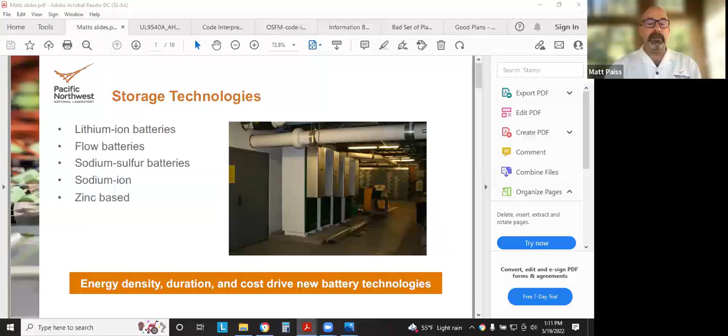They don't use cobalt, which has some human effects in how it's mined, and that's really critical. But from a hazard perspective, there are still some risks with any of the lithium ion chemistries. So we really want to encourage safety at a system level. That involves the quality control, the cell manufacturing. You can have a top tier cell that has a manufacturing defect that could result in a thermal runaway event. How the battery system is put together, the battery management system, and that is really the key device that manages the charging and discharging of the batteries.

And if there's any overcharging or undercharging, it's the BMS that will turn it off. The communications among all these subsystems, the environmental controls where required. Any fire protection system really needs to be tailored and designed for that hazard. And then the last item really is one of the key ones. It's workmanship. You can have quality components, but an error in the workmanship could lead to a fire. So it really truly is a systems approach.

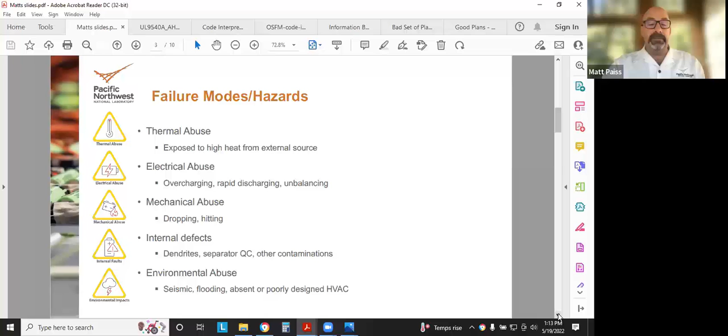primarily micromobility devices. So one of the questions is, are these devices meeting the requirements of the UL listing for micromobility devices? If they are, then we need to look at where there's a gap in those standards and try and address it. But internationally, that standard, and I know Megan, you're on the call, you'll correct me, drop in the chat the actual UL number, 2272, is really an important standard, but it's not necessarily adopted internationally. And so we would like to see that.

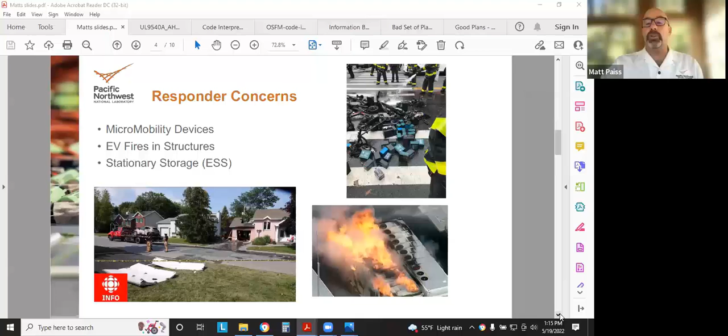And then lastly is the stationary storage. Thankfully, there are not a lot of responses that responders are having to go to. However, we're still fairly early. And so we do want to get ahead of the curve in terms of training and recommended best practices. Okay, so I just want to put that out, that the reality is this is where the fires are occurring. It's primarily in the smaller devices first.

Okay, next slide, please.

Now, in the residential space, which is the majority of the people on this call, there have been a couple of incidents and some recalls. Luckily, the manufacturers are trying to respond to these very quickly to identify gaps in either the design or in the codes and standards. So some of the earlier installations were not required to have gone through large-scale fire testing. And now that is a requirement based on the second edition of 9540. It does require the fire testing to 9540A for residential batteries that are installed indoors or on walls.

The bottom picture is actually from Germany. And since that incident, there's actually been several more in Europe, and even an explosion in a residential battery. So that is a great concern. The explosion risk is probably the greatest concern. Fires, while they can cause a lot of damage to the building, the explosions actually can be significantly damaging. And to date, the only fatalities that have occurred were due to an explosion in a utility scale system in China, to some firefighters. Okay, next slide.

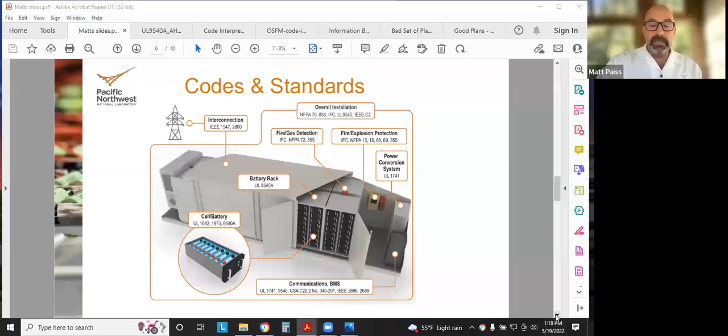On the residential side, we have 1973, 9540, and the 9540A standard. I think I have a slide. I'll get into that in a minute. So, okay, let's go on to the next one here. Okay, so let's dive real quickly into 855 and the International Fire Code. These are the key installation documents or codes that reference the installation of energy storage systems.

855 is really only enforced in about 5 states, but if you're in one of those states that adopt the international or the NFPA 1 fire code, the section on energy storage, I believe it's chapter 52 in the 2021 edition, just points directly to, it's a redaction from 855.

The 2021 IFC, which is the most current published one, but not widely adopted yet in the US, very closely harmonizes with 855. And the 2024 edition, which will be released later this year, will have further improvements. NFPA 855 is getting ready to release its next edition, the 2023 edition, after the technical meeting in a couple of weeks, barring last minute floor votes.

You could actually go online and see what the second revision looks like. It experienced a lot of reorganization and some refinements in some sections. Okay, so I bullet the key areas that it references. Okay, let's go ahead to the next section.

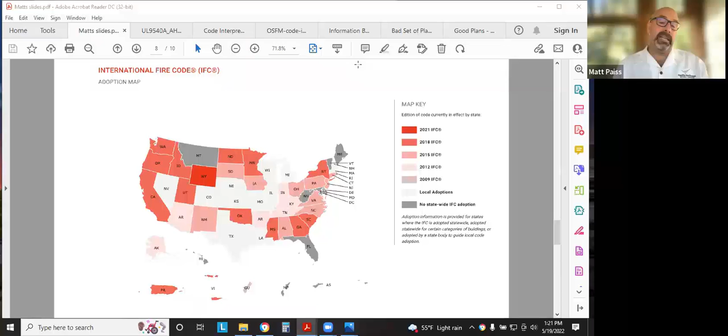But not all states adopt even statewide. You can see that the white states don't adopt statewide, they adopt locally. So you could really have even more of a checkered quilt effect. And so for those of you that are national installers, you understand that pain. So that is one of the challenges out there. Okay, next slide.

Okay, so 9540, and let me just see real quick here. You know what, I think what I would like to do, Brad, I want to hand this off to you now to have you talk a little bit about your experience in the process of approving systems with listing. And we can go back to the 9540 slide or use that one here, but I wanted to hand off to you. Actually, yeah, just before we get into that,

just on the last topic of which codes you're using, I just briefly want to touch on, because this is a very common question that comes up, is should I be using the residential code versus the fire code? The good news is, as we keep developing code cycles today, in the 2021 international code, they are very streamlined and there are very minimal differences between them.

So the goal of the international code committees is, and I'm speaking to the residential section, to get those residential sections aligned as much as possible between the fire code and the residential code. And there's still a few minor differences, but like I said, today, the good news is that they are very much in alignment with each other.

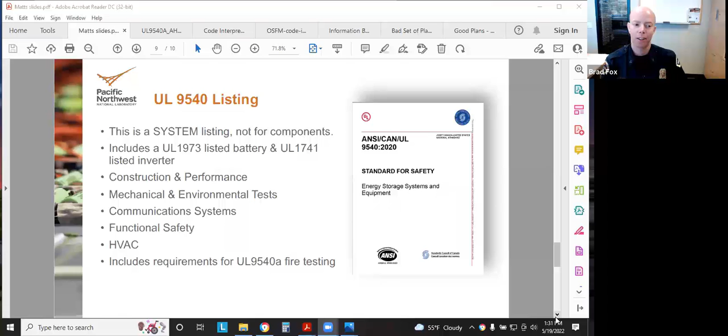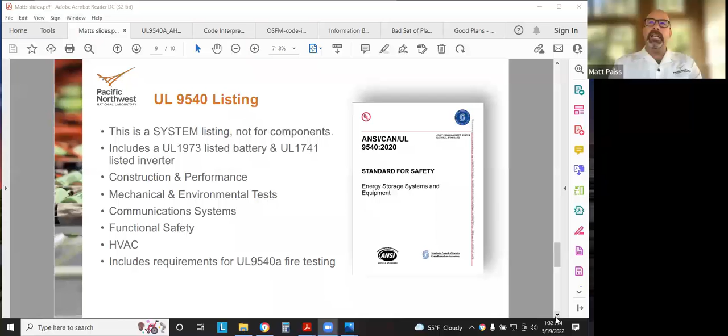So we still have questions out to UL and the manufacturer on how that affects their 9540 listing, but it's an interesting conundrum between the different editions. Brad, let me touch on that if I could. Yeah. The genesis of the 9540A test method was developed to help create data.

Lithium ion batteries installed in residential and commercial was in its infancy. There were some questions on safety. You really want to develop codes and standards based on data, not just a random 3-foot number, which truly is where that came from. So, okay, you create an initial number, you have a starting point, but you want to back it up with data so that modifications are based on data. So that's what 9540A was really intended for.

What we're seeing now is that 9540A is increasingly becoming a part of the product listing, depending on the locations of the batteries installed. So somebody could get their system listed to 9540 with the full knowledge that this system will be designed to be installed in remote locations where, per the fire codes, there is an allowance for not having any fire protection. However, many systems are being designed to be installed in multiple locations. And so that manufacturer is being guided to also do that fire test so that that data is available. And so that's a little bit of the evolution.

In the second edition of 9540, the 2020 edition, it does require the fire testing for indoor installations, for residential installations. And so now where we're at is that there is a requirement in fire codes that the fire test report be made available to the AHJs.

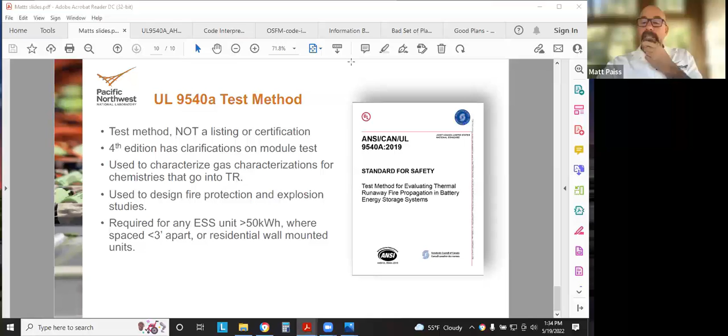Another key point that I want you to take away from this webinar is you need to review these reports. As Matt said, there's a lot of variation in the reports. It's not a listing, so it's not something that you can just take and say, well, someone's submitting this 9540A report to us, so it must be okay. In my jurisdiction, we have yet to review a 9540A report that we didn't have comments for. We have yet to approve one on the first go around. Even reports from UL, who's writing the standard, we always have comments because the reports differ so much.

In this webinar, we're not going to teach you how to review these reports. That is an entire class of itself. But I just want to touch on some highlights and again, please be aware that you have to review the reports. And if you don't want to learn how to do that or don't have the expertise, talk to some of your fellow jurisdictions, neighboring jurisdictions who have reviewed them. Use the networking that you have available to talk to others. Or, I hate to say it, but if you're not going to review the report, I would err on the side of safety for the residential systems and say you cannot approve them.

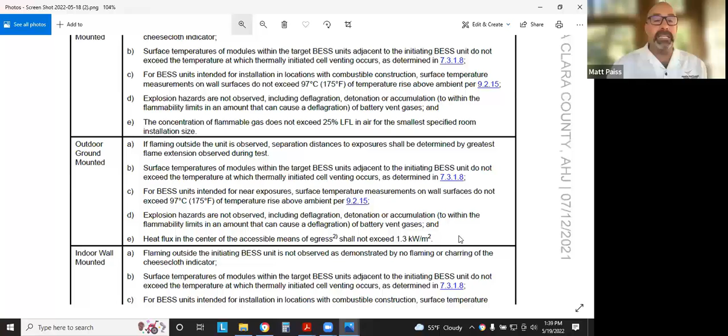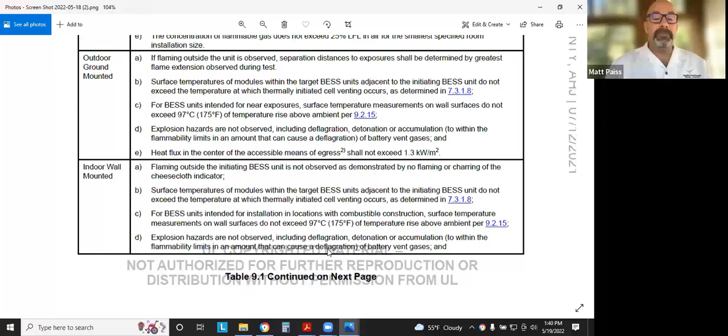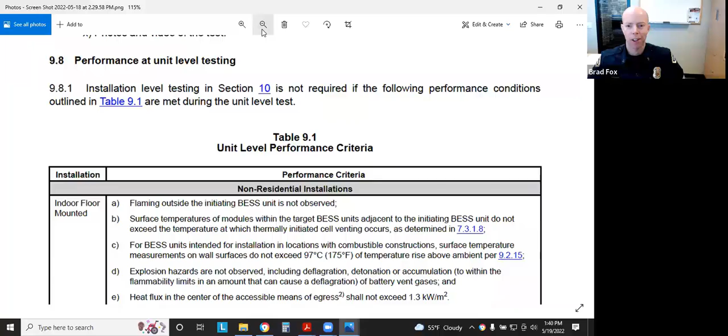Okay, subclause D. Explosion hazards are not observed, including deflagration, detonation, or accumulation to within the flammability limits in an amount that can cause deflagration of battery vent gases. And I'm sorry, it's E. Go to the next page at the very top. Do we have the next page on that one? I think it's on the, these are screenshots. So okay, that's fine, we do have it. I think it's the next file. That's non-residential. We need to go to the residential.

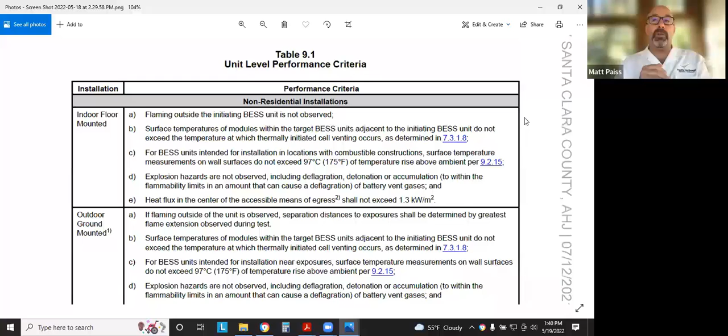And what it's going to say is that the flammable gases shall not be larger than 25% of the lower flammability limit of the smallest area the battery is installed. Okay, that's in the residential requirement. So what does that mean? What that means is that if a manufacturer is putting their battery inside a smaller space, then it could be that there's enough flammable gases developed during that test that you could have an explosion risk.

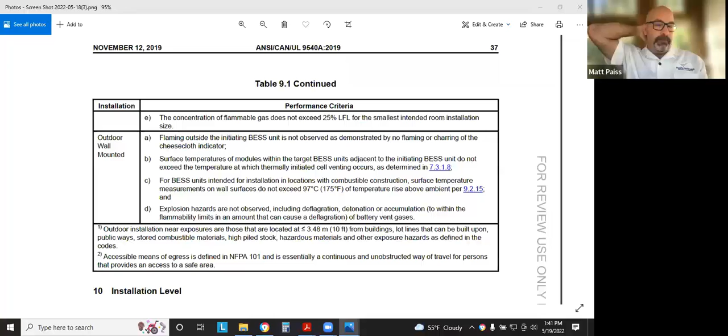So my personal feeling is that it would be very helpful if the test report actually stated, based on this test, this is the smallest cubic foot space or cubic meter space that this battery should be placed in. That would provide the manufacturer some actionable data to include in their installation manuals. Any comments on that, Brad? That's a great point. And to date, I have not seen that provided in any of the 9540A reports, and that is always one of our comments. So obviously, as AHJ, you want to know how small a space can the installer safely put one of these systems.

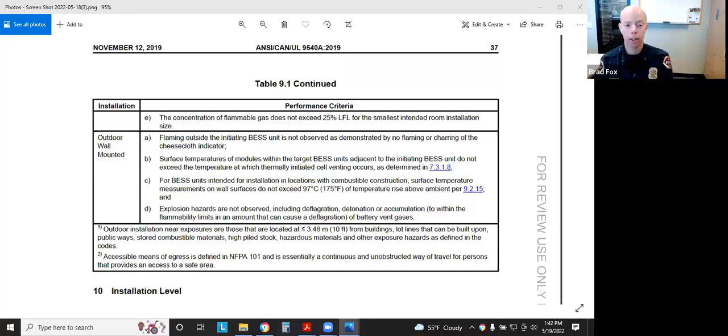So the gas data is there in the report, and typically what ends up happening is the manufacturer, once we comment, will hire an engineer or a qualified person to take the data from that test report and figure out what the smallest volume allowed is when you hit your 25% LFL. So that is definitely a critical piece of data for us to know for installing these.

And a bit of the irony is, you know, this is only a part of the 9540A report. So if someone wanted to install a residential system in a small utility closet, and they are maybe only one unit, or they had 3 feet of separation between them, you wouldn't be required to know that data just per the base code for the 9540 listing. It only comes into play with this 9540A report.

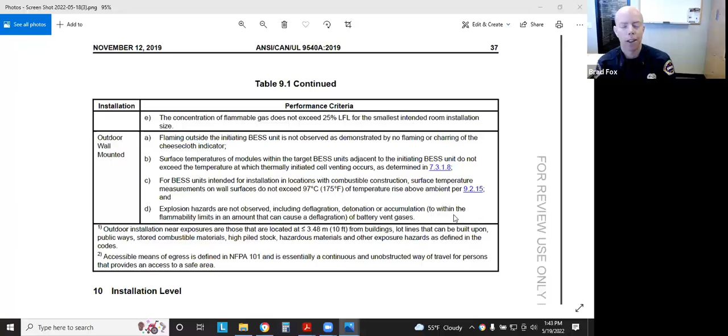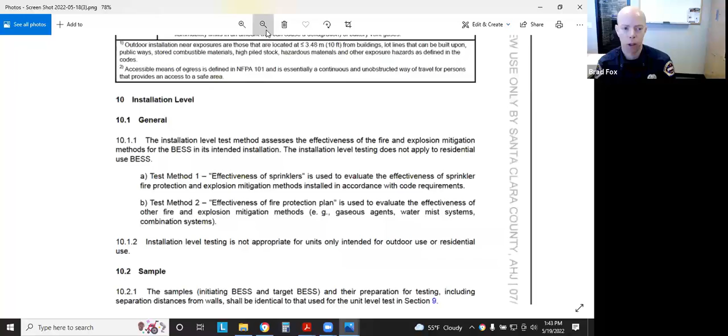But that is a key piece of data, and really the reason we were showing you these screenshots was so you get a copy of UL 9540A if you don't have one already for reviewing these. And in the back, I just wanted to highlight these tables, that the tables do a nice job of summarizing what the requirements are for the different installations.

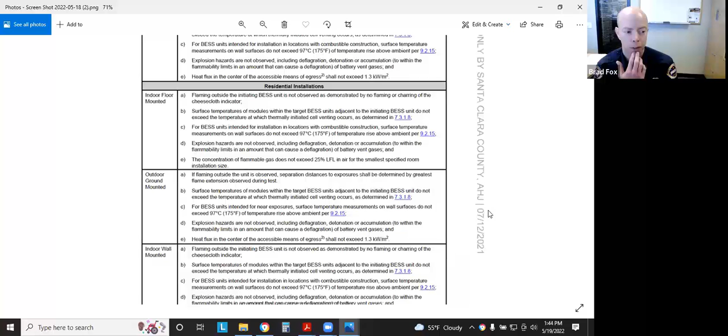And you have to pay attention to the application of where they're installing it. So for example, if the 9540A report was tested for indoor and outdoor wall mounted, but the application that you receive is for a ground mounted, and they didn't test for that, well then they need to test for that. So making sure that the application that you're seeing for the installation matches what the test conditions were.

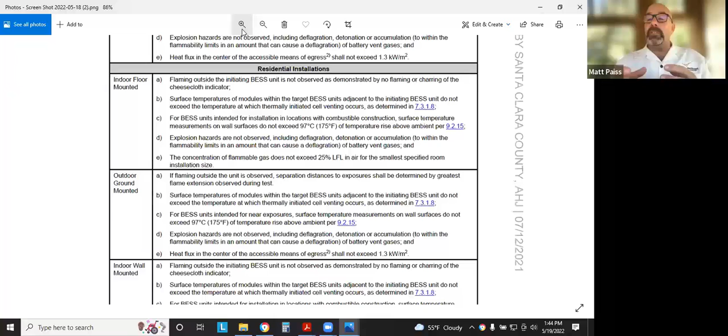Brad, let me highlight what you just said in another way. You could have a battery that was evaluated as a ground mounted battery, and now it's being installed on a wall. A ground mounted battery, it's acceptable to have flame coming outside of it, as you can see in subsection A there. If flaming outside the unit is observed, the separation distance shall be determined by the flame extension. So that allows some flames to come out. But now if that battery is installed on a wall, you would not be allowed to have fire come out. So that's a great example that you just highlighted there.

I'm monitoring the chat too, and I wanted to do a quick shout out to a comment from James Trudeau at UL. Thank you, James, for saying that. He highlights one of the challenges in performing a good test. It really depends on how many cells go into thermal runaway. And this goes back to the quality of the test that's done. I have seen tests where only one cell was driven into thermal runaway by the heated cell. And the way it was done, it was not representative of the worst location in the module.

It's one of the reasons why the 4th edition made some changes, because the 3rd edition allowed some modifications to the module. So there is some magic in performing these tests, and I wish it wasn't that way, but ideally you want to have it be performance-based, where somebody can design a module that is safe or has very great propagation mitigation and receives acknowledgement from that. So we're always walking a tight line in creating standards. You don't want to be too prescriptive.

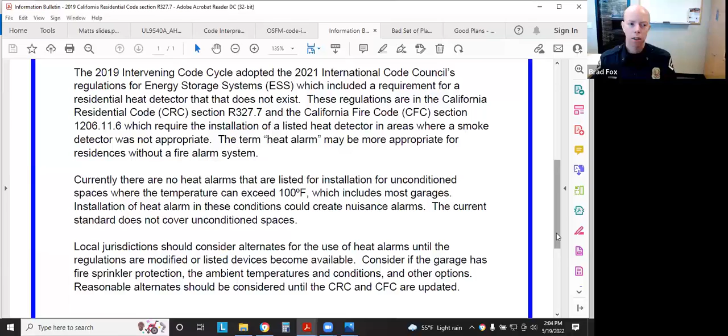So a couple issues here. One is the UL standard for heat alarms, which I believe is UL 539, currently doesn't cover unconditioned spaces. So here in Santa Clara County, California, we get some warm weather at times, and temperatures can get up in the 100s.

And if you look at most of the heat alarms that are sold at like Home Depot or the commonly accessible ones, those ambient temperature ratings are limited to 100 degrees. They generally activate at 135, but if you look at the listing, the ambient temperature is 100. So you're going to have to make a determination of whether you feel comfortable or not with that heat alarm that is not necessarily listed for unconditioned spaces, and particularly if you're in a geographic area that experiences high temperatures.

The California State Fire Marshal realized this was an issue, and so they released this informational bulletin. It's not a code interpretation, it's just an informational bulletin, and they basically said they realize the issue with the 100 degrees and what's currently out there for heat alarms. So they don't offer a lot of guidance, to be honest with you. They tell you to try to do the best you can is how I read this.

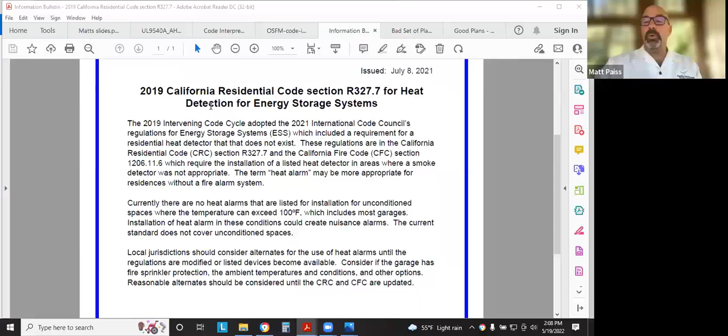So, hey, Brad. Yeah, I'd just like to highlight an interesting discussion in the chat. So one, Bruce mentions that the standard is being updated, but we've also had somebody post that there is actually a product available that's listed for that temperature. And I just looked at it. It's available on Amazon. So the market seems to be responding, which is really good news. So all the installers out there, take a look at that product that's listed there, and hopefully it will suit your needs to provide this level of alert.

The only other thing that I was going to do is show a couple sets of plans. I think we might not do that just in the interest of time and make sure we're answering people's questions. But one key point that I was going to make in regards to that is make sure that the relevant information that the inspectors need is shown on the plans. Oftentimes in a lot of departments, the fire department may be doing the plan review, but it's the building electrical inspector that is seeing these in the field.

So make sure that you're working with the building department and getting the relevant information that pertains to fire safety related issues on the plans, because the building inspector may not be aware of all of those. And when you're reviewing these plans, what I was going to highlight is it's very basic information that can be provided. For commercial permits, I think they're a lot more involved and there's a lot more information you need.